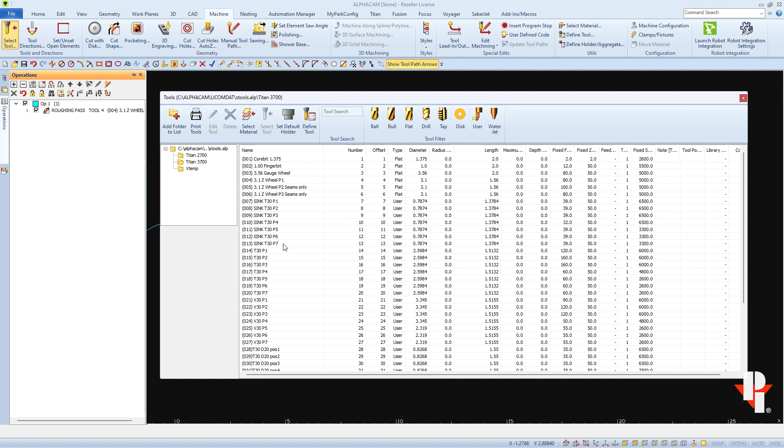The next tool that I'll use in my eased edge style is the T30 position 1, which I'll select from my tool library and make it active in my drawing. Again, I'll go through the cut shape parameters. I'll remove the stock to be left because we usually leave stock to be left values in the Titans tool library. When the parameters are set correctly, I'll apply them to this line.

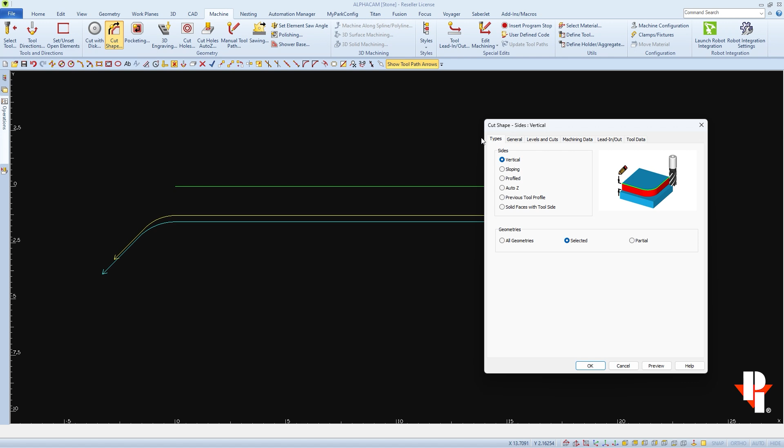I'm going to repeat this process for the next 6 profile cuts that I have to make. I'll verify and/or adjust the settings, and then I'll apply the cut information to the line that I made. After I've applied all my cuts, I can open the operation panel where I can ensure that I got all of the cuts that I wanted.

Now I can convert all of these cuts into a style. I'll start by going to the first cut and right-clicking on it so I can choose Save as a New Style, which opens up a File Explorer window to the default location where styles are normally saved.

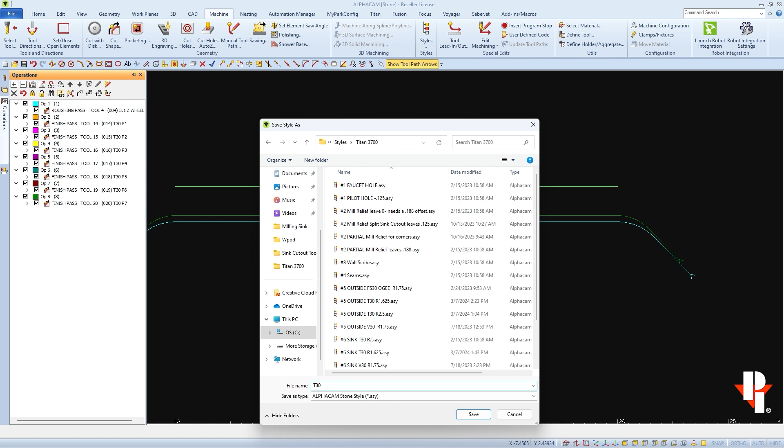I'm going to add these styles into my Titan 3700 subfolder that I created. I'll choose a name to define my style: T30, diameter of 80. The leads are for an outer type cut, and I'm not going to run a gauge wheel with this style. I'll save this one cut as a style named T30 D80 out no gauge.

And I immediately have a style with that name in my Styles Manager panel, and when I open it, we see there's only the one cut in it.

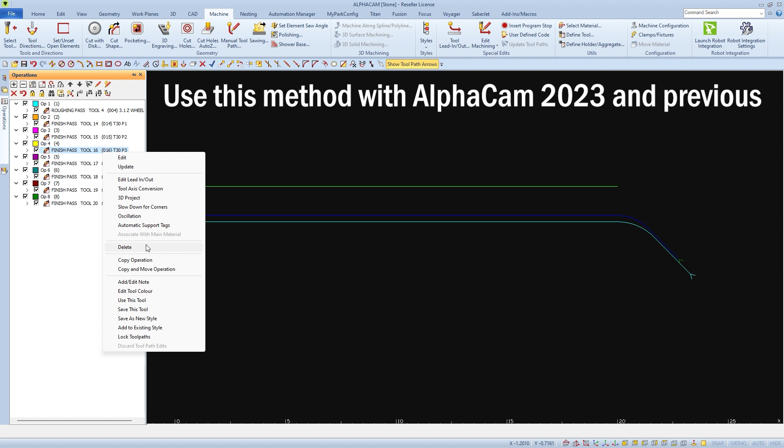I'll add the rest of the cuts to this style by going back to the Operations panel and right-clicking on it so I can choose Add to an Existing Style. I'll have to repeat this process for each operation that I want in my style.

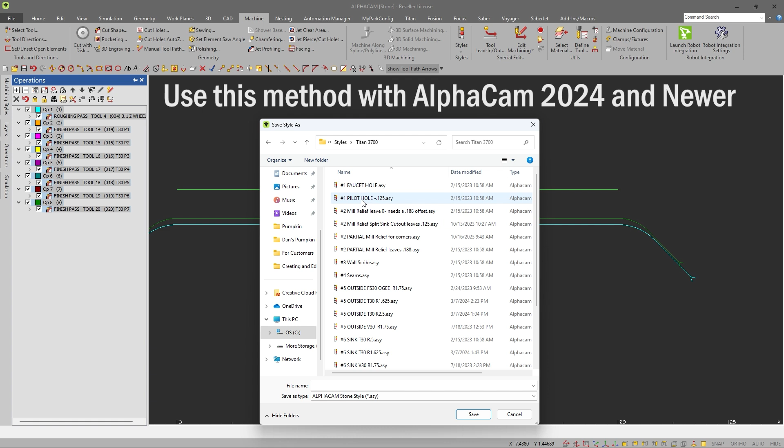In Alphacam 2024 and newer, you can click on the top operation, then press and hold the Shift key on your keyboard and select the very bottom operation that you want to save into your style. Then right-click and choose Save as a New Style. This will select them all at once.

Now if I go back to my Machining Styles panel and look at this style, I'll see that I have 8 cuts total. There's no need to save a style once it's created, but I'm going to go back and test it by deleting off the toolpaths and then using the style to reapply them to my prepared line.

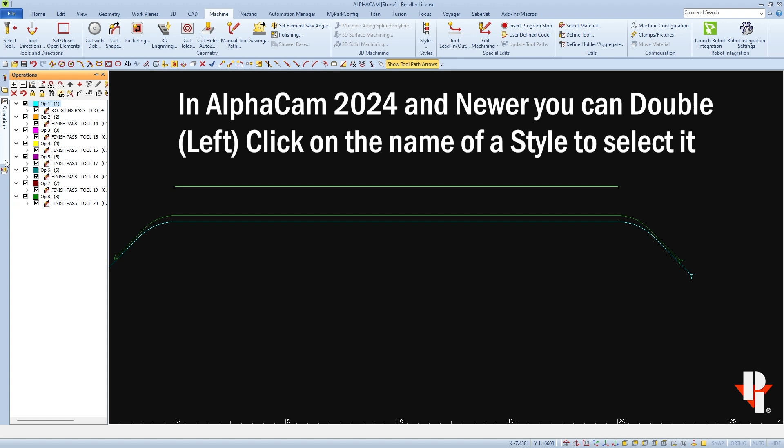And I'll open the Operations panel to verify that all my tools were applied and in the order that I intended.

The next thing I'm going to do is go through and copy that style, then edit it so I can add in the same type of style with a gauge wheel. I'll start by deleting these existing cut paths off of my prepared line, then make a cut operation and apply it.

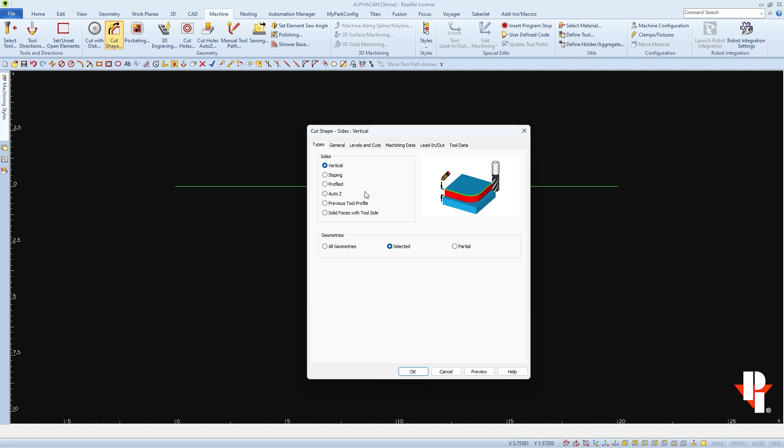I'll start by selecting my gauge wheel and making it the active tool, then go to Cut Shape to input my settings, as there are a few that will change when gauging. One is under the General tab, Compensation. Instead of using Machine Comp, we're going to use Tool Center for the gauge wheel. Another is found under Levels and Cuts, where the final depth probably shouldn't be at 0.

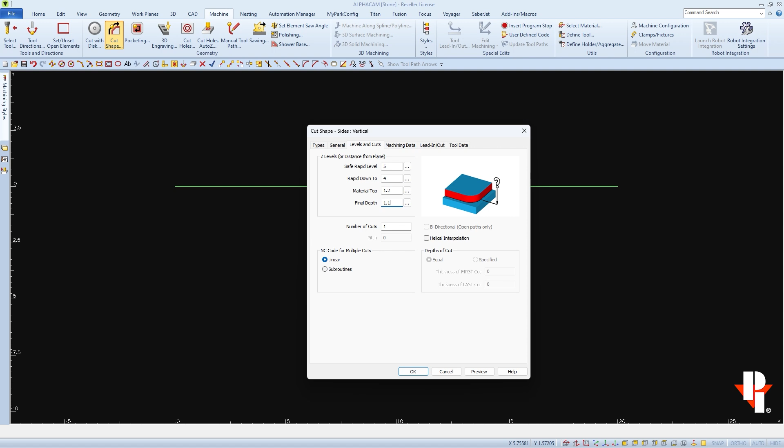I'm going to set mine to slightly less than the material thickness, as this will be the final thickness of my part after it's gauged. Then under Machining Data, I'll use Stock to be left as a negative value to set the width of the gauging. This value should always be less than the radius of the tool I'm using.

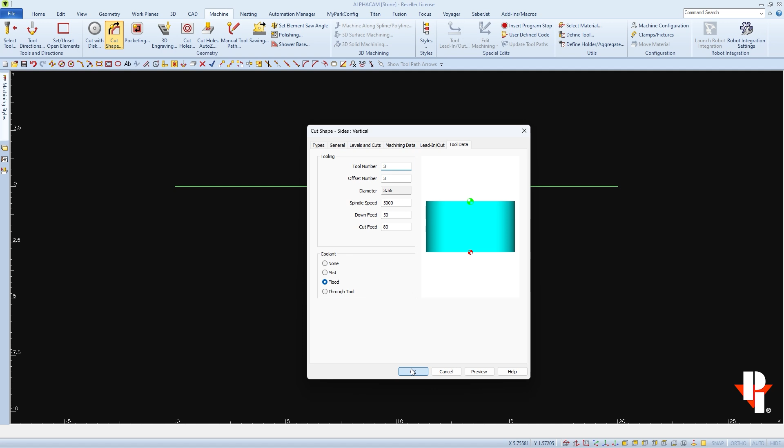I'll want lead in and out, probably the same settings as I normally use. And when everything's set correctly, I'll click OK and apply this information to my line.

Now with the cut operation available, I'm going to copy my existing style by selecting it from the Machining Styles panel and right-clicking so I can choose Copy Style. Now I can find a copy of the style I've chosen, and when I open it, I can see it contains the same cut operations as my original.

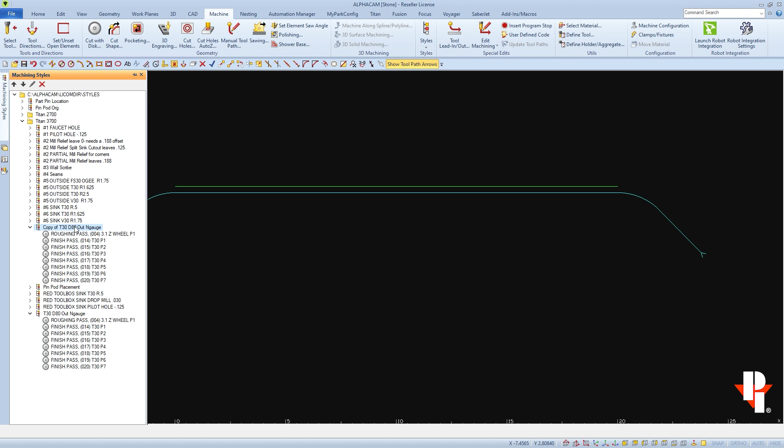Now I'm going to change the name by right-clicking on it and choosing Rename Style, and I'm going to change the name to T30 D80 Out Wgauge.

And now I can add the gauging operation that I created earlier by going back to my operations and right-clicking on the gauging operation and adding it to the Style Wgauge.

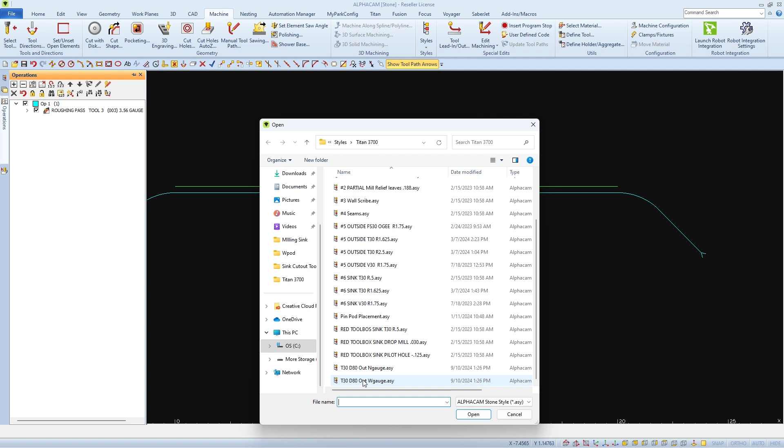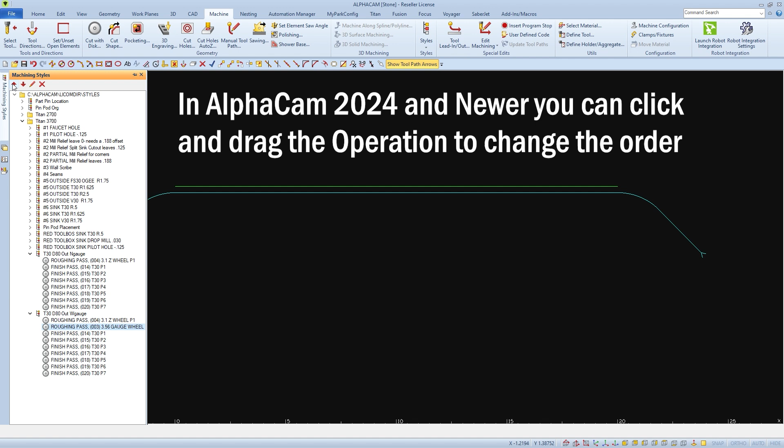And when I go back to my styles, I see that it added the gauging operation to the end of my other operations. If I want, I can change the order by highlighting this operation and using the red up and down arrows at the top to put it in the proper order. I'll move mine up to right after the Z wheel one.

After creating, copying, or editing a style, there's no changes that need to be saved. In this next example, we're going to copy, then edit the style to use new tools.

So again, we'll go to an existing style and make a copy of it. Then I'm going to change the name to reflect the type of profile tools that I'm using in it. I'll open the style to see that it has the format I'm looking for. I just have to change out the tools.

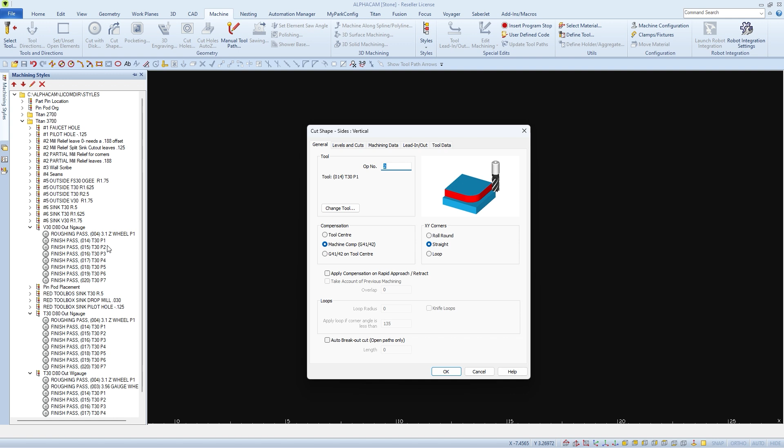I'll right-click on the first cut operation and choose Edit Operation, which opens my Cut Shape window where I can find Change Tool under the General tab.

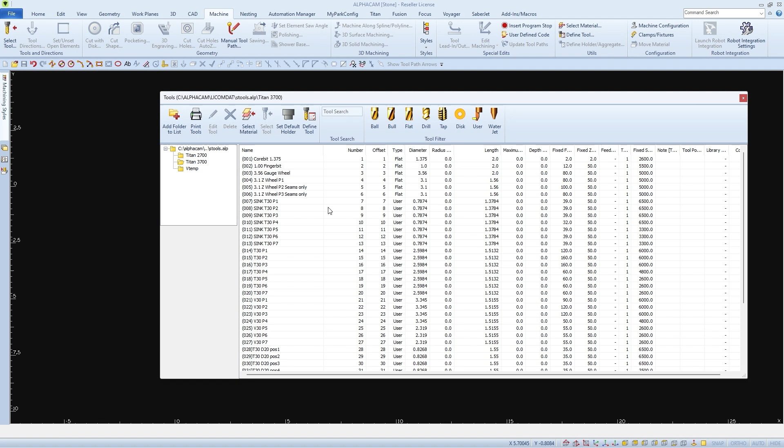Pressing Change Tool opens up Alphacam's tool library. Here, I'll select my desired tool by double-clicking on it, then click once anywhere in the drawing to make it active. Then when I click OK, I get Alphacam's notification that the changes have been saved to my style.

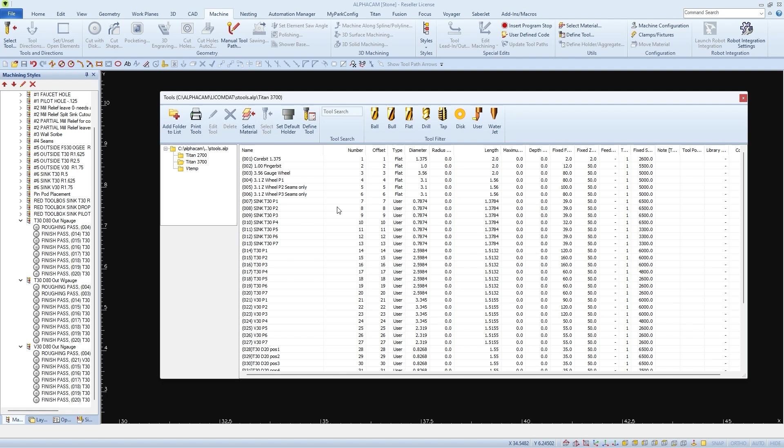I'll repeat this process, right-clicking on the next operation, then choosing Edit Operation to open the Cut Shape window, then click on Change Tool so I can find my desired tool, double-click on it to select it, and then click in the drawing to make it active.

I'll repeat this process until I've changed all the tools in this profile set. When I'm finished, I'll go and review all my cut operations, and after verifying the tools and their order, my style is complete.